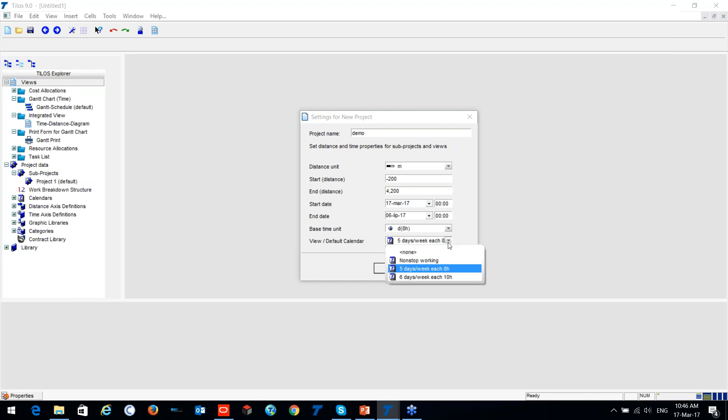So in my case, I'm just creating a new project, and I took the general template. In my general template, I already have my resources, some cost and time library information, and I will just set this as the demo. Project name is demo. I can choose a different unit type. Later on, all this information can be changed, so it's up to you. For now, you can just create. I'll just give the start and end distance, the start date and end date. It can use calendars; multiple calendar support is provided.

I'll just create a simple view, and what we can see here. So you see, this is the paper. Just think about Tilos as paper based: you can just take a pen and draw your activity or your project right on the paper. For instance, we have our start, let's say from 0, and at the end 4 kilometers. All right. So now I'm planning by just inserting one task.

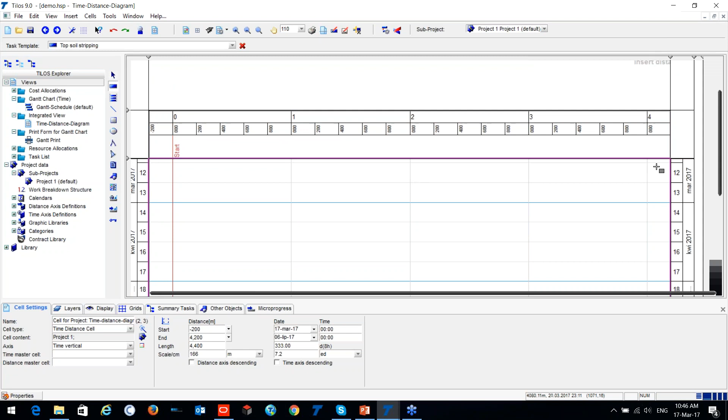I have here my template called topsoil stripping, and I'm planning my task. Okay, so I just draw my task. My task already has predefined information, such as this display and information about the quantity. Right now I don't have a quantity, but later on I will input it very easily.

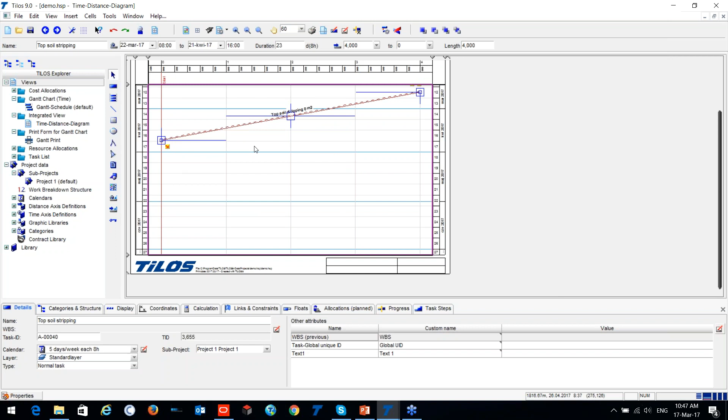Now, before this, what I would like to explain is this is our main area where our project will take place, but where is all the data stored? Tilos is a file-based system, and all the information you have is in one file. So this is, for instance, demo.hsp. This is the file, and all information is stored right there. You don't need any other files. And everything is in the Tilos Explorer.

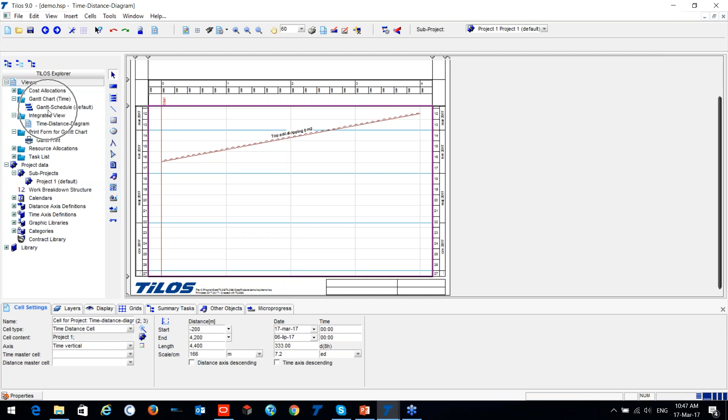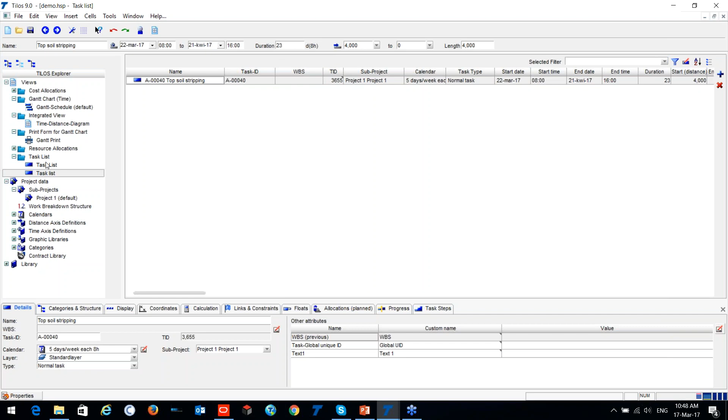So for instance, I have my different views: the traditional Gantt chart, or a time distance diagram. I can have my task list. You can see this is the same as Excel. You can have the ID, the work breakdown structure, the calendar information, start, and so on. Everything is there, and it's also possible to edit it. Moreover, if you have resources, you can have the resource list, all the lists over here, and they can be copy pasted, or it's up to you how you would like to see it.

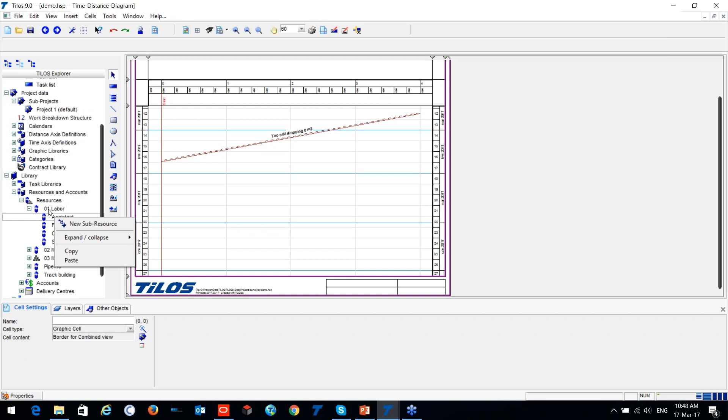Moreover, on the library part, please pay attention. This is our library part. In the library part, we have the information about my tasks and resources. If I open the resources, I have my predefined resources which come from the template. You can easily create a new resource or sub-resource. You can edit it, change the account, change the unit cost. So this is very easy and manageable to do.

Assigning a resource is also possible, just by selecting the task and adding the resource. For instance, I can have here one specialist and one Caterpillar, and you can see my resource has been assigned to the task. Moreover, graphical information is possible to see. We have here different symbols which we use for the graphical representation of the project, and other information: currency, units, categories, sector types, and so on.

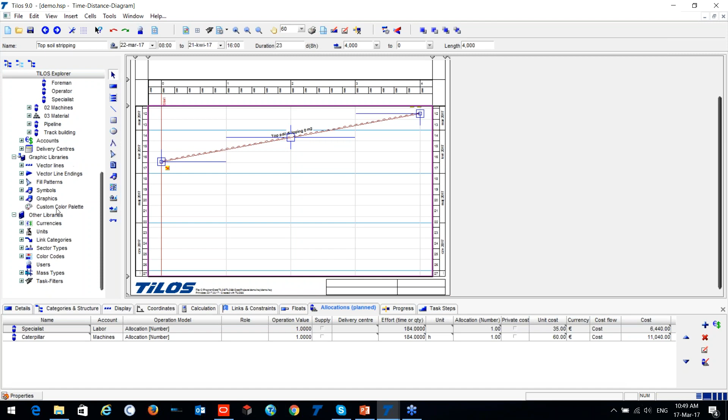So, what more can we do? I'll just show you an example of what we can do. In this case, let me remove my resource, and I will set the quantity. As I was mentioning before, Tilos has different types of calculation models. We can calculate according to the quantity, the work rate, or the duration. Let me show you how I can calculate according to the duration.

I'll give the quantity in cubic meters, and let's see what kind of information it gives me. Now, we have 20,000 cubic meters total to be stripped, but my planned work rate is only 120 cubic meters per hour. So Tilos automatically calculates my duration.

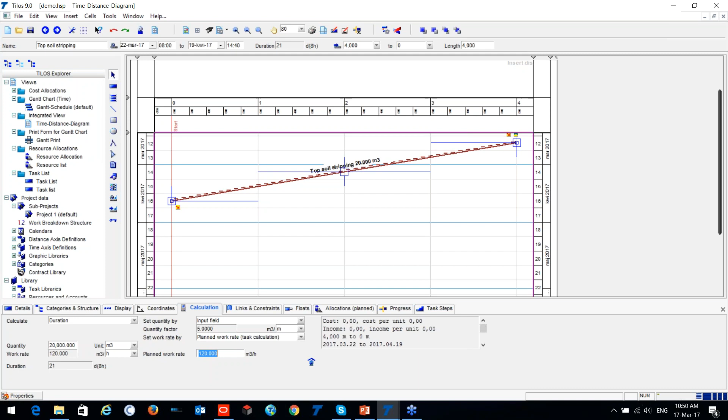Okay, so what if I increase my work rate, and I'd like to know what my duration will be then. I will change my work rate, for instance, to 240 cubic meters per hour, and please pay attention, my duration has been changed. This is on the properties bar. You can have detailed information. However, if you want quick access and a quick view, just look on the top.

We have the name of the activity, the start date, the start hour, the end date, and the duration, as well as the length information and the distance information too. So I'll just go back to my planned work rate. Okay, now another very good example I would like to show is the splitting.

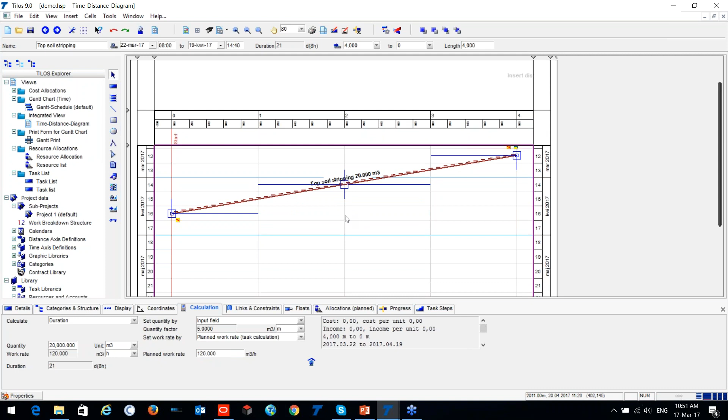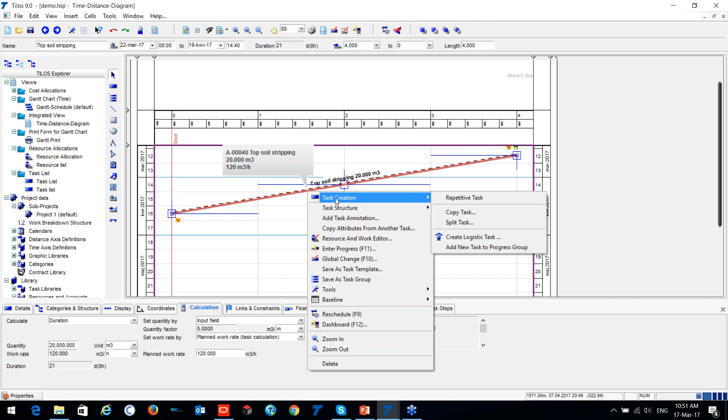Like when your activity is the quantity loaded, sometimes you have to stop your work or just split your activity. How can we do it in Tilos? In traditional CPM we are doing it all manually, like once we split our task, we have to calculate the duration of it, and then calculate the quantity of it. Here in Tilos we don't need to do this because it does it automatically. So we can split the task, different methods are available, but in my case, let me show you.

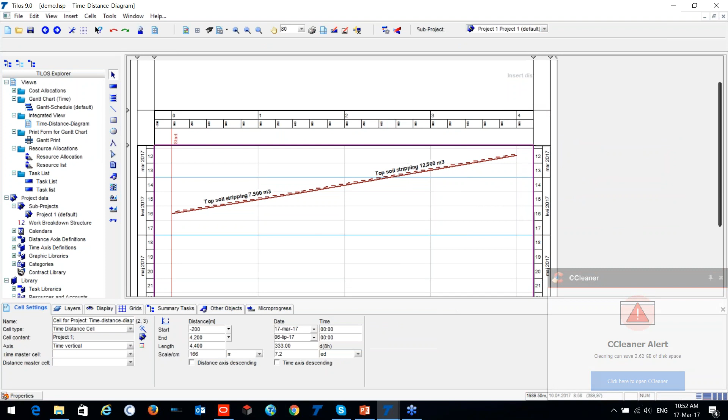I will split it on 1000 to 1500 meters. Okay, I'm splitting my task by the distance on 1500 meters. So please see, my task has been split, and the quantity automatically has been split as well. So from 1500 meters until 4000 meters, my amount is 12,500 cubic meters, but the rest part I have 7,500 cubic meters. All right, so this is how you can understand Tilos.

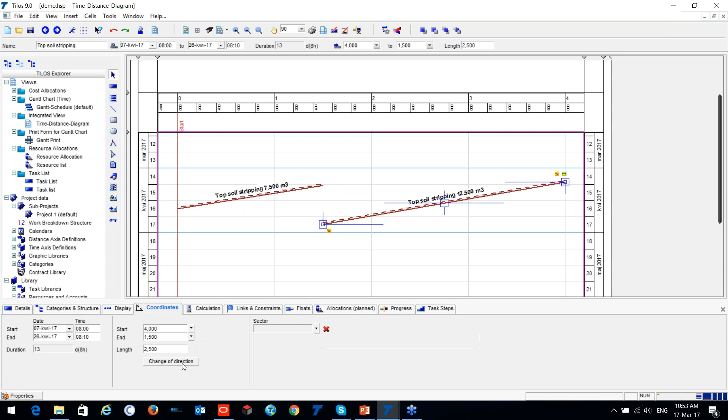Once again, I'm repeating, you are able to manage your crew movement. For instance, from 1,500 meters you are starting the work, and you can see that your crew will be working on this side, and it will take them 8 days, for instance. But if you would like to finish all the total works in a shorter period, you can, for instance, change the direction of it, manage according to this, or link it automatically and then reschedule it, and you will have everything right here. The linking options I would also like to mention, which are very powerful in Tilos.

Like we can have it by the calendar time, by the working time of the predecessor, the percentage of the duration of the predecessor. You know what the percentage is? If the predecessor has reached some percentage, then your successor can start. Equipment mobilization: you can give the mobilization of the equipment, you can give a fixed speed. Okay, so it will calculate your lag automatically.

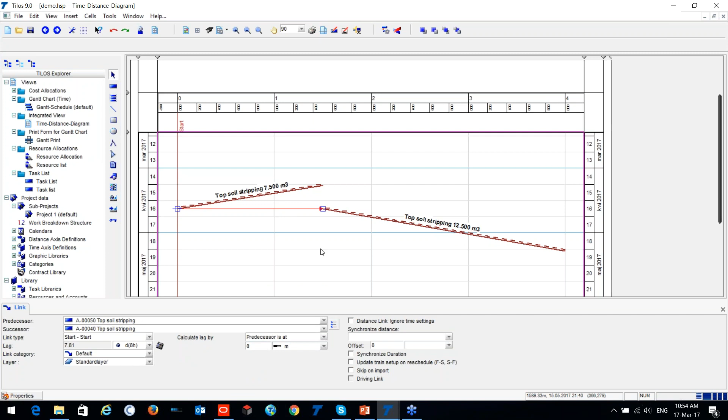Also distance to successors, which I was mentioning, that two activities, for instance, cannot work closer than, say, 100 meters or 200 meters, or also give additional time for that. Or for instance, when the predecessor is reaching some distance, then we can start our other activities. All right, so this is the example of how we can create the task. This is the linear task.

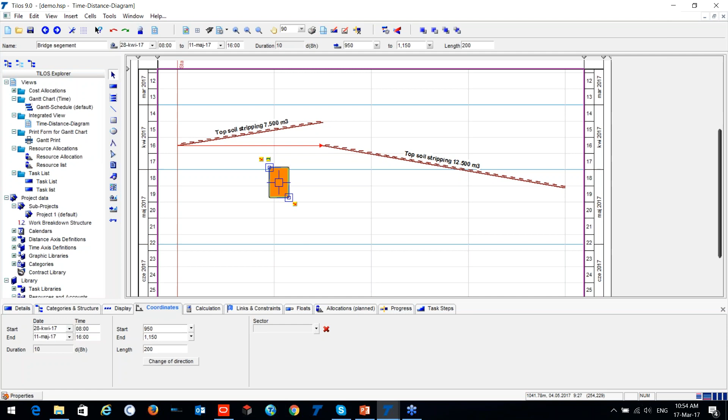I can easily create some structural task. Let's say, oops, not this one, I just misclicked. Let's say I have my bridge segment. So this is also the task. You can change the display of it. You can define any color if you want. It's up to you how you will have it. It can be, for instance, the rectangle, the parallelogram, the lines, and triangle. It's up to you how you would like to see it.

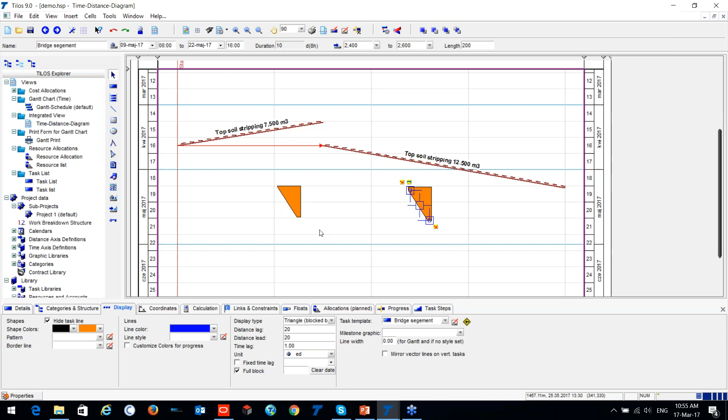Alright? The task can be moved very easily, and it can be copied and pasted with the Ctrl+C and Ctrl+V options. You can manipulate the task however you want. Alright? I will just delete them. And okay, this is about the basics that you have to know in order to read Tilos. Now, for another example, please see, I have my Tilos. This is a sample project.

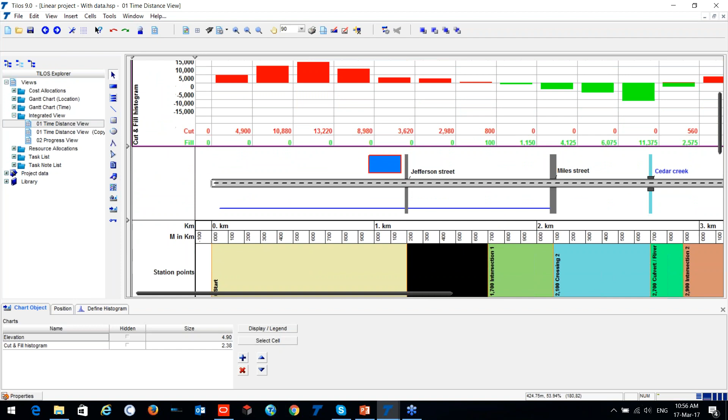This is, I think, each 500 meters. Yeah, this is the display of the information. Each 500 meters you can display information, each 100 or any other scale. Okay. Also the filling information, graphical representation, symbolic representation of our work, of our project. Sorry.

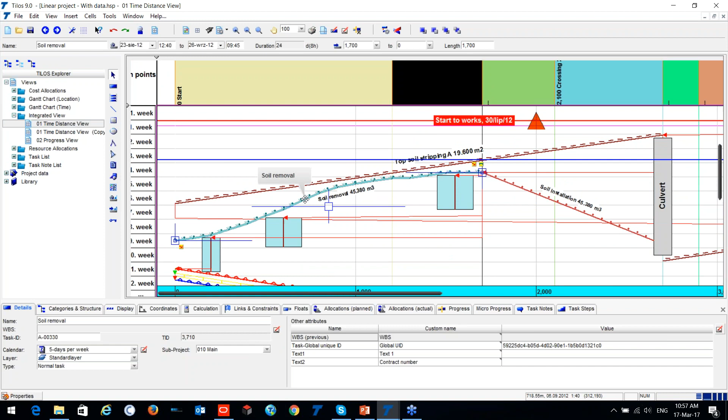Now, the information about my kilometer, the meters in kilometer, or my station point. So it can be the districts, for instance, or it can be the different sections as well. My milestone activities, and so on. So now, one thing that I would like to mention is, remember in the presentation part, we had the topic why we had the two breakdowns.

Now, this is the subject of it, that we have here my activity, which is soil removal, and the information, like, it's not just linear, it has some shape. So once I move my activity, it becomes a different shape. Why do I have it? Because it's getting the information from my profile data, which means right from above. Okay, so right from above.

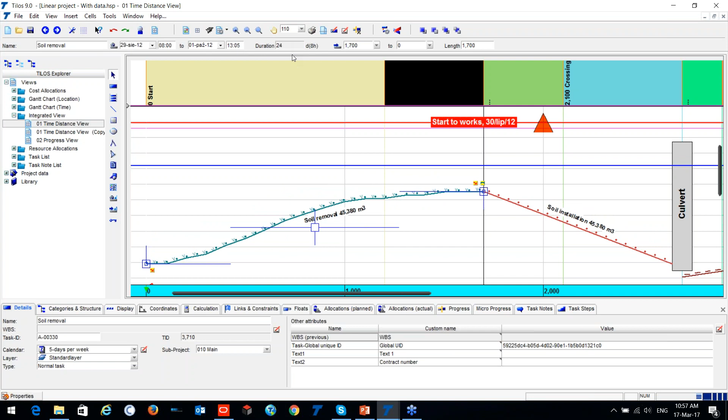I will shorten this task and you can see how it changes. Also, please pay attention to the quantity information. It changes on the quantity level as well. Alright, so this is a very powerful tool for us in order to calculate the real duration of our activity. Here we have that it will take us 24 days.

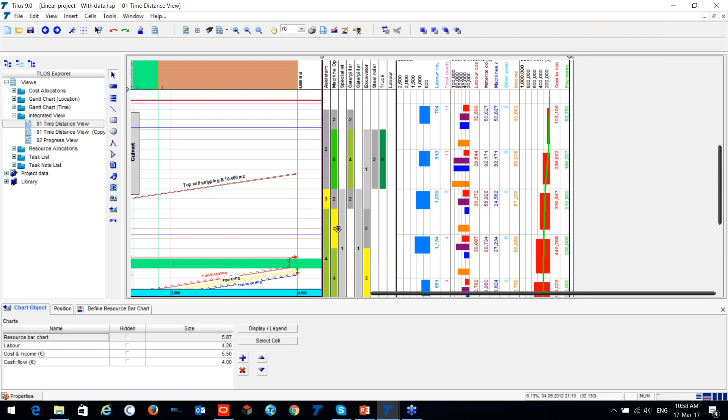Now, moreover, I would like to show you the information about the resources. These are the preloaded resources on activities, the labor information, the labor hours, total machine hours, cost and income, and the cash flow diagram as well. So that was on the time axis.

However, please see, I have the same information but according to my distance. Alright, so I have a machine operator, the specialist, and so on, the number of the resource over here. The histograms, such as on the distance, this is the 500 meters, and we have the total people working and total machine working numbers, and also the cost and income according to the distance.

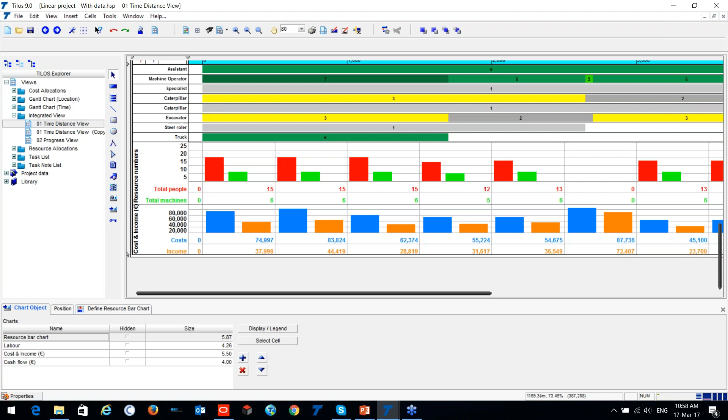Okay, so now the more, let's say, specific topic is tunnel building. This is just an example for you. We have 550 meters of the tunnel, which will be worked with a TBM. We have our planned soil classification, or for instance, let me just remove it for now.

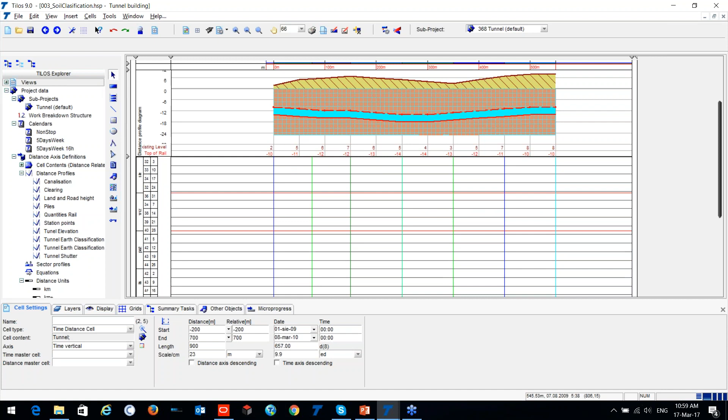What we can see here, we have a standard, traditional, not so standard time distance diagram. We have our profile, so this will be our tunnel. Okay, and now we would like to plan. So I would like to plan first my TBM. So I'm planning, I will start somewhere in August, and I have my plan. So now I planned my TBM work. This is my TBM, this is planned.

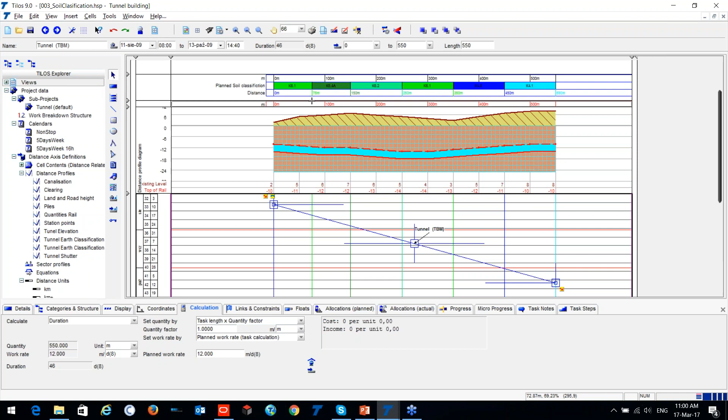This is usually when you are planning and submitting for the tenders. So you have a plan. Now, later on, you receive the information about the soil. So you have the planned soil classification. So what you can do is plan according to the given soil classification. From 0 meters until 75 meters, you have this K6.1, right? From 75 meters until 150 meters, you have K6.4A type.

Okay, let me just make it shorter. And now, once we have information from the planned soil classification, I can plan my works according to this data. All right. So I have my plan, and I'm starting at the same time. And now, please pay attention. Okay, I'll move it, I'll make it a bit visible. So please pay attention that the work rate has been changed according to the soil type. Once we reach the area where we have, for instance, 250 meters or 150 meters, it has a different work rate. Okay, so I'm going down, I'm moving.

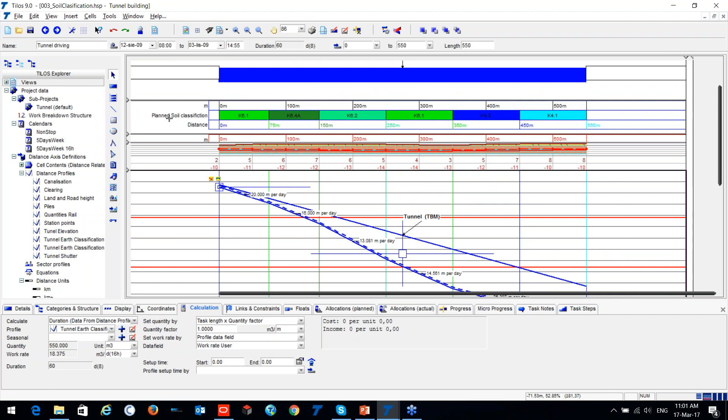And you can see that with the given planned soil classification, we can say that we'll be in delay for a few weeks. And you can see that the calculated finish date is this. This is based on the owner's soil classification.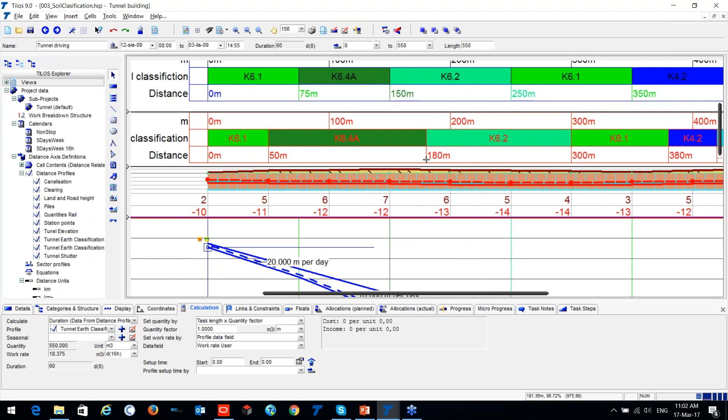Now, once you start the work, you did the geological test, and you have a bit different soil classification. So this is the panel where you have the actual soil classification. So you see, as I said, from 0 until 75 you have the K6.1 type of soil. However, in the actual, K6.1 was from 0 until 50 meters, and from 50 meters until 180 meters you have K6.4A.

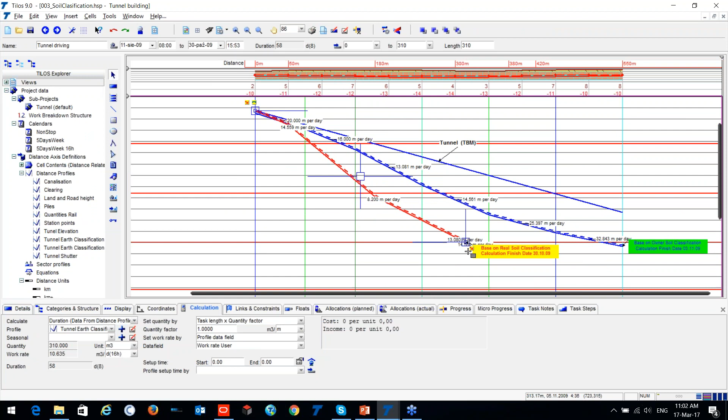All right, so this is different. So what you will do in this case, you will give the actual soil classification, and how it will look like, you see, you can say that according to your actual information, you will have a different work rate. So what it means is, if we plan, this is our initial plan, okay, we were about to finish this time. However, when we receive the information from the owner about the soil classification, we can have a plan according to their soil classification, okay?

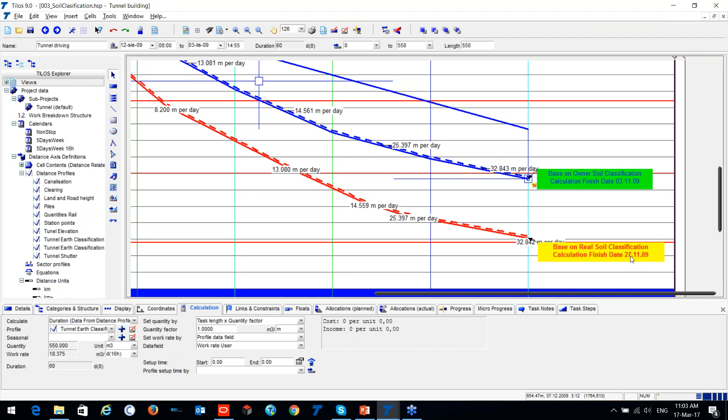But now when we actually do our work, we can see that, sorry guys, but your soil classification is actually a bit wrong. But here is our soil classification, and we can tell that we will finish on this date instead of this. So it's 1 month later. We'll finish it 1 month later. All right. So is it clear?

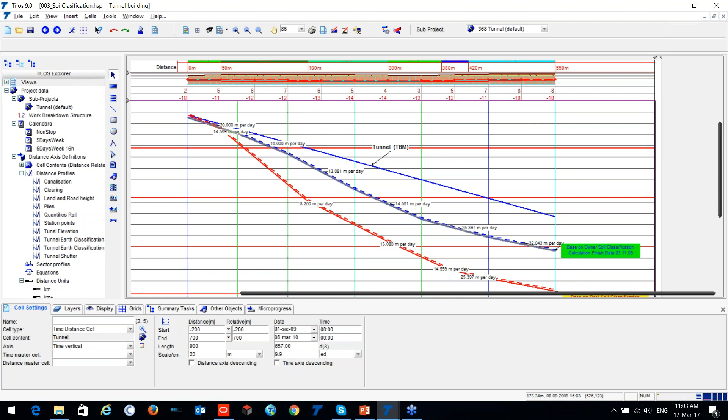Okay. So now another good feature that I would like to show is the actual export from Primavera. All right. Here I have my sample project. This is the metro. Okay, this is the metro project where I have the information about my tasks, and here I have the information, my distance and the start distance and the end distance. So this is my standard task and information I added about the distance.

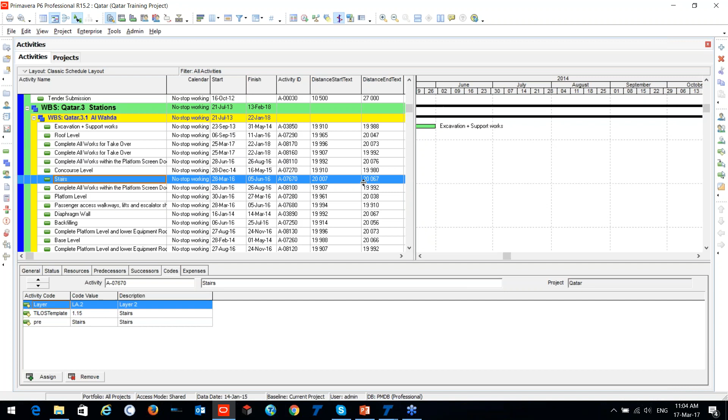So what I can do is I can just export it as a Primavera XML. Okay, I'm exporting this as a Primavera XML. I will not do this in order to save the time. I have already exported the XML file. So what I will do is I will just keep it over there, and right now let me explain to you my template.

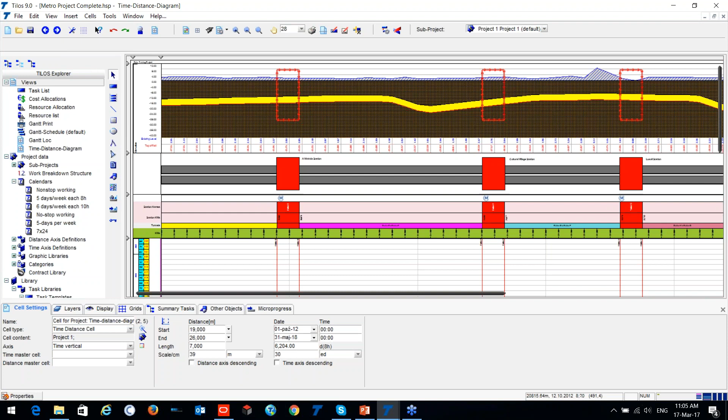Alright, this is a template where I have my tunnel information and I have my station. So this is the station name, different districts, the kilometer information, but without any activities. I have the empty time distance diagram. Alright, I have my empty time distance diagram. Nothing is there, but this is my template.

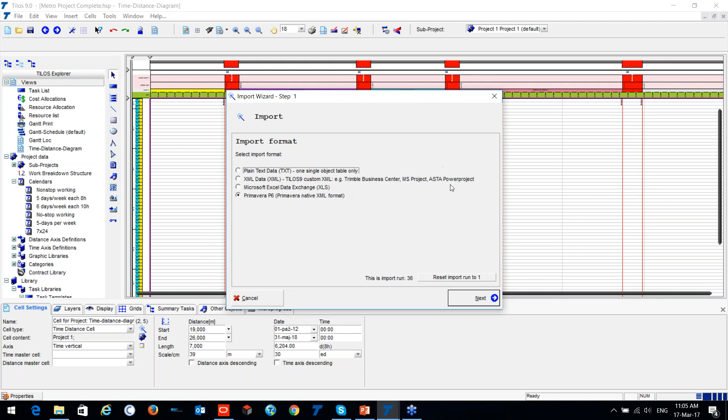So what I will do in this case is I will just import it. I will take the information from Primavera. It is, by the way, possible to import from MS Project and Asta Powerproject. Probably I was mentioning this. However, it's good to remind. I will take the next. I will select my XML. So this is my XML.

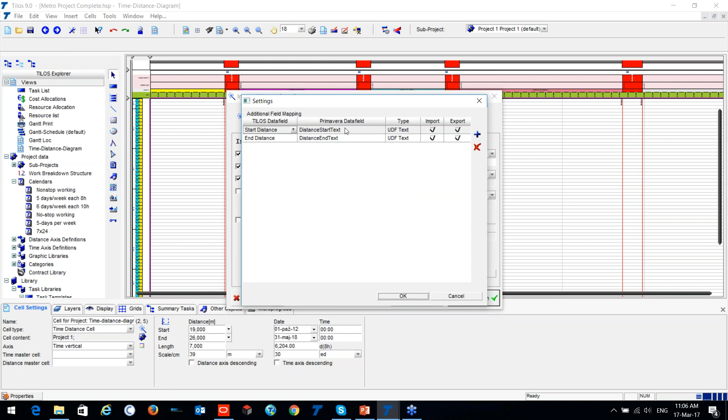Now, it gives us an opportunity to choose which data we would like to import, whether we would like to take the tasks, the categories, the links, the resources, the cost information, or some sector profiles. What I will do is I have here my additional field mapping. So I'm mapping my information from Tilos and information from Primavera. Okay, so once I click finish, you will see that all my activities just appeared over here. So these are all my activities, you can see.

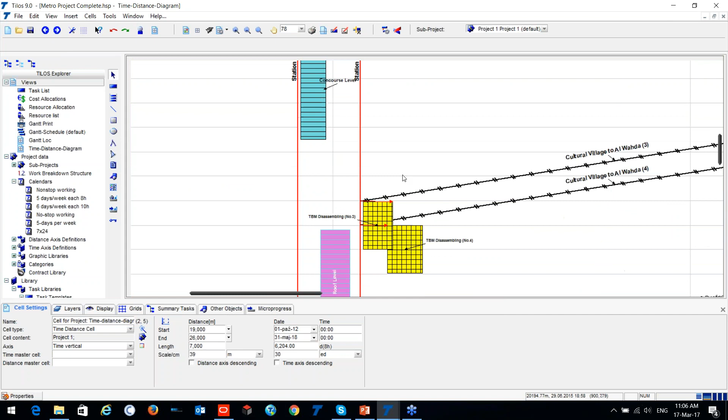So let's say this is a roof level, TBM disassembling number 3, TBM disassembling number 4. You have here the plant, the stairs, the backfilling activities, and so on. These are the station works, all right. However, if I move to my tasks, here are my linear tasks. Okay, so this is my linear task. So everything you can have in Primavera, it's possible to export to Tilos as well.

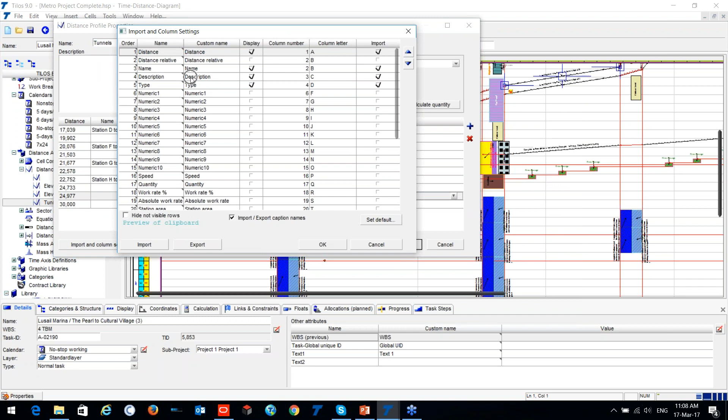It's up to you which information you would like to import, whether it's from Excel or from the clipboard. It's up to you how you would like and which information you would like to display on Tilos. Okay.

Mr. Kapila asked the question, being a junior engineer, how do I convince my boss or the site project director to use it? Well, ask them the simple question, do they have time distance scheduling, or are they using only the traditional CPM? If they do time distance scheduling, they can do it in Excel, but it will take them ages. So why do you have to spend that much time and do everything manually in Excel when you have Tilos?

Okay, moreover, let me see.

Mr. Jacob asked me whether an update file exists in Tilos, similar to the one in Primavera while importing, so that he doesn't have to change the graphical representation of the activities every time. Yes, you are updating the file. Once you, for instance, set your data date and enter the progress on the traditional CPM in Primavera, the same way you just export it and import it to Tilos. All right, so no problem with it. It has an update file, so you don't need to do everything new and lose any graphical representation of the activities.

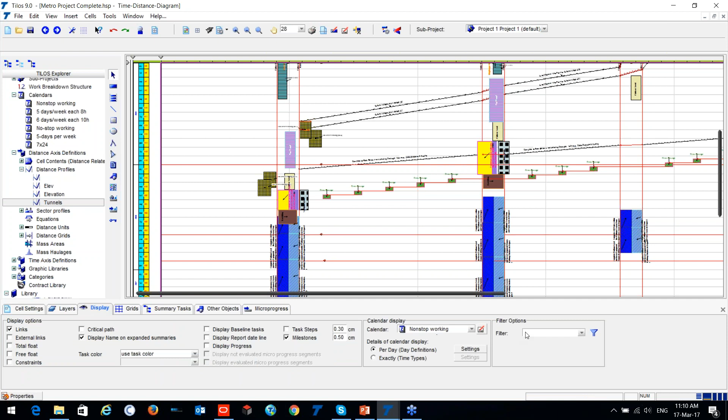Mr. Jacob asked whether the filters can be used. He would like to see if it's possible to display only one activity. Yes, it's possible to display only one activity. There are multiple filter options here. For instance, I can have the tasks. Here I have my filter options. It can be filtered according to different parameters: the calendar name, the category. For clashes, if you have tasks with a clash, you can just filter them in order to see them, no need to go through each activity. For constraints, or whether you have a critical path, you can filter by the critical path or by the task name.

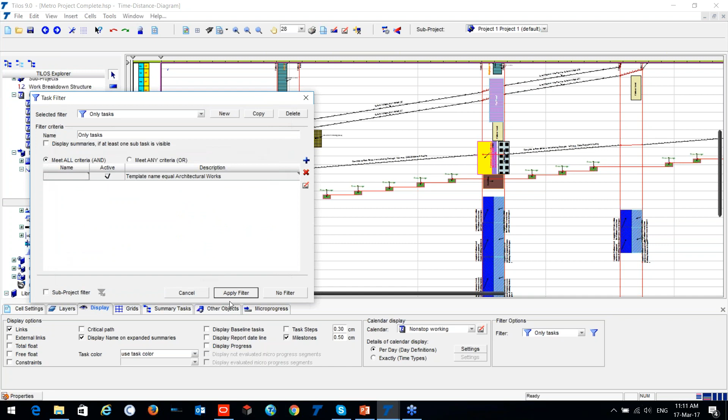For instance, I can have here the task template, and I will show some architectural works. So you can see I just used my filter for architectural works, and only the architectural works have been displayed. That's why I was telling you to understand Tilos as a paper view. So whatever you would like, for instance, if you would like to draw only one activity in order to see its progress or its information, it is possible to create a new view.

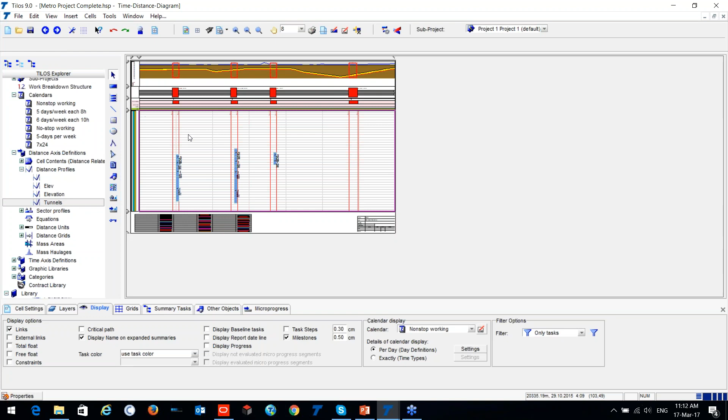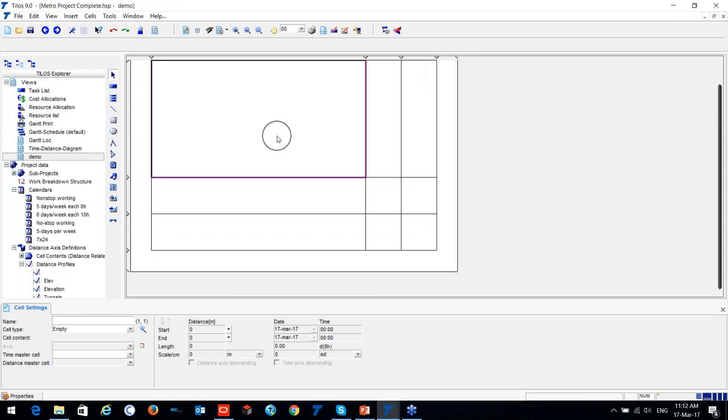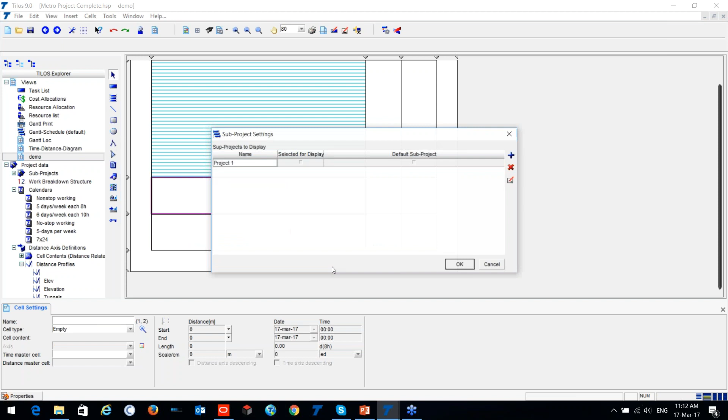So you can create a new view. I'll just do a demo. I can create a new view, add different rows, different columns. So this is up to you how you would like to display it. First might be the time distance diagram. For instance, I will make it a time distance diagram. Okay, so this is the time distance diagram. This is my traditional Gantt chart with time. This one will be my distance Gantt chart.

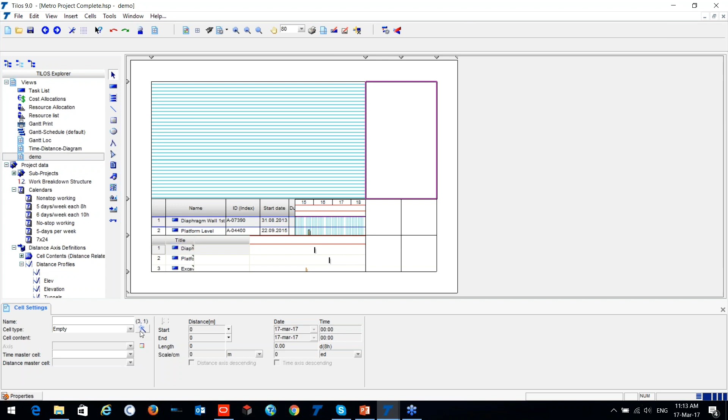On the left side, you can have dashboard reporting. For instance, I can even glue this cell. So this is the paper, this assumed paper. Whatever information you would like to see, you can have it, no problem. So I can have this one as my dashboard. So you see, this is my dashboard information. How you would like to see it is up to you. Now let me continue with the questions.

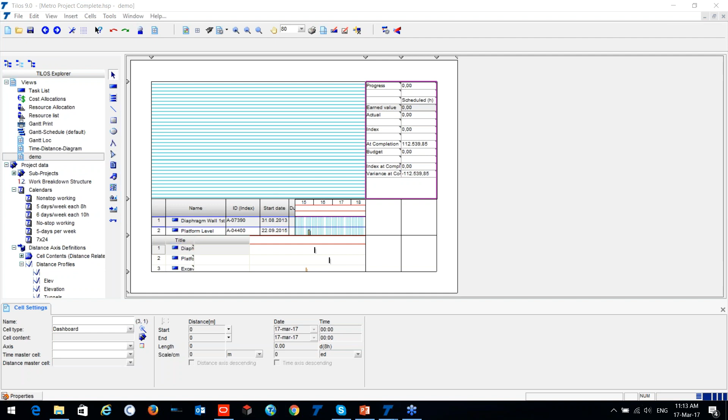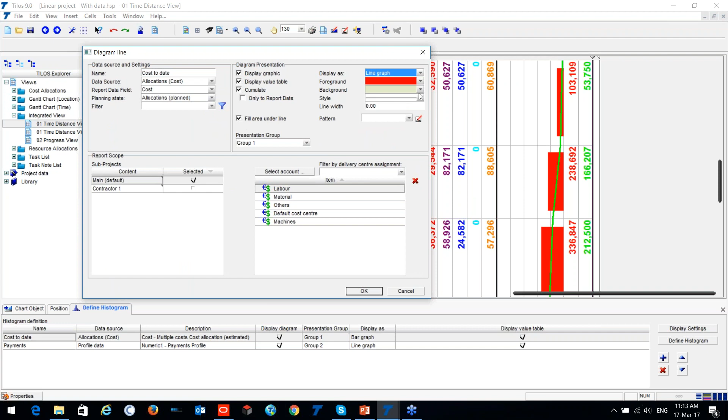Okay. Mr. Vatwa asked whether an S-curve is possible. Yes, the S-curve is possible. If I'm not mistaken, I have them already prepared. Yep, right here, for instance, this is my S-curve. I can display a different view on it. I can show the fill area under line. For instance, line, and I can change the line style. Okay, so here is the S-curve. It is possible to have the S-curve as well.

Okay, Mr. Verender said that he has around 3,000 activities in his Primavera schedule. No problem, you can have them as well, or you will have even fewer in Tilos.

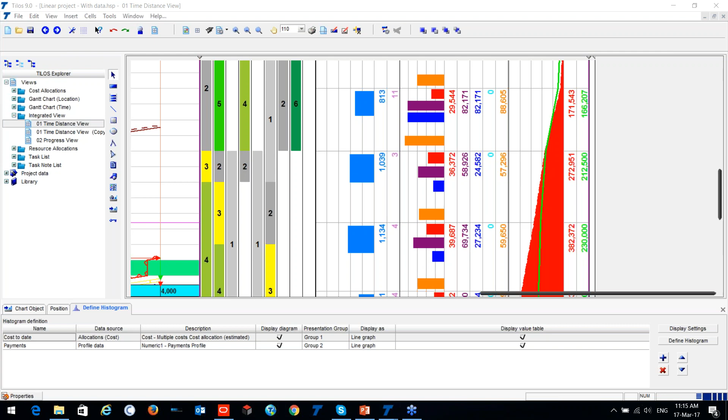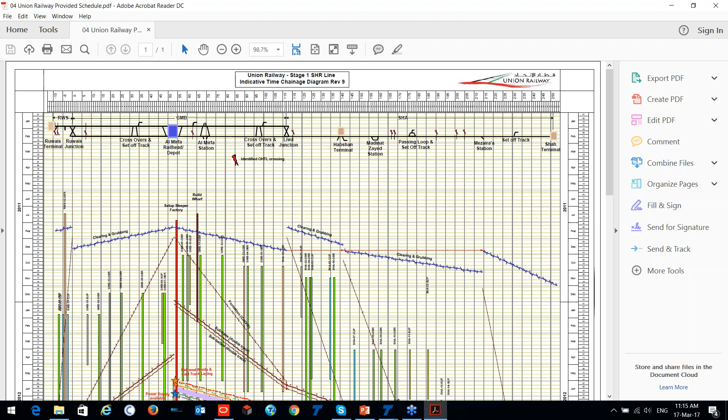Okay, another question we had: are all libraries shown today available as a standard? Yes, this is available in the standard. Moreover, I can show you another thing, another sample project from a real railway project. This is the Union Railway project. All these tasks we have here, you can see this. This is the real project.

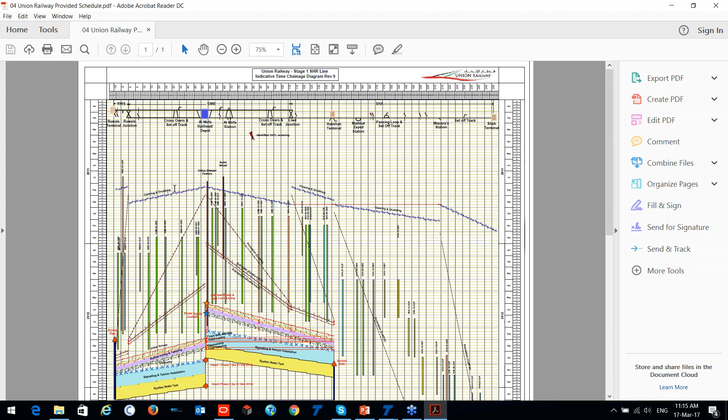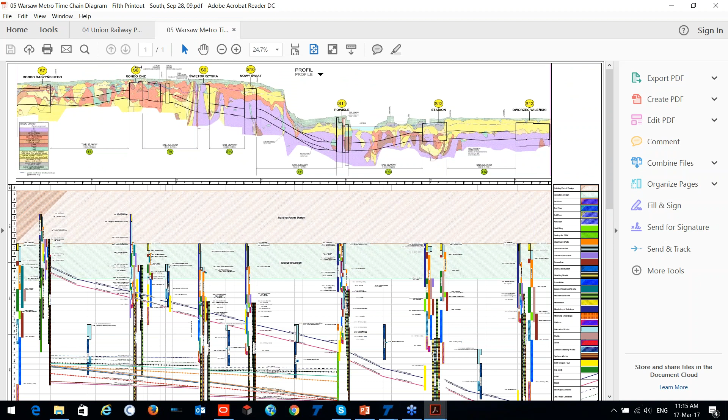Another option we have here. This is a Warsaw Metro. You can have here the graphical representation. We have here the metro stations. We have the station works, and we have the TBM works. All right, so all this we have.

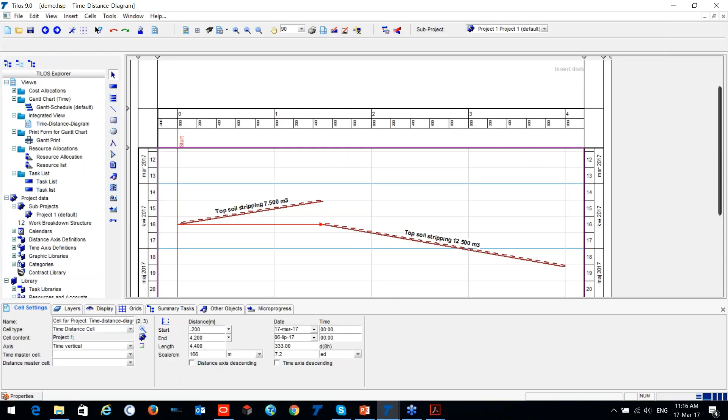Okay, another question we had is, can we have a special calendar with the holidays or special days off? Of course, you can have special calendars, and you can display them in Tilos, no problem with it. We have a number of calendars; you can use a different calendar for each activity. Here you can have a different calendar for each activity, or it is possible to have a layer.

Okay, I had a question from Mr. Render. He has around 3,000 activities in Primavera, and when he starts updating and comparing plan with actual it will be difficult. How to handle? Well, once you have your baseline, you export it to Tilos, and you save it here in Tilos as a baseline. You have here the baseline manager, and you can have multiple baseline information. Later on, once you enter the progress in your traditional CPM or whatever tool you are using, you just import to Tilos and compare it. Okay, so let me go on with the questions.

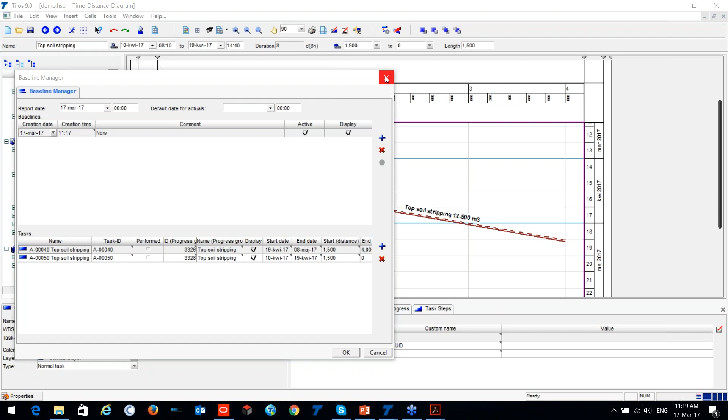Okay, we had already this question regarding filtering. Yes, we can filter the activities, no problem. Can we have a customized view as per responsibilities? Yes, you can have a customized view, no problem. I will even show you some examples. Here I have the sample project. So you can see I have here my view.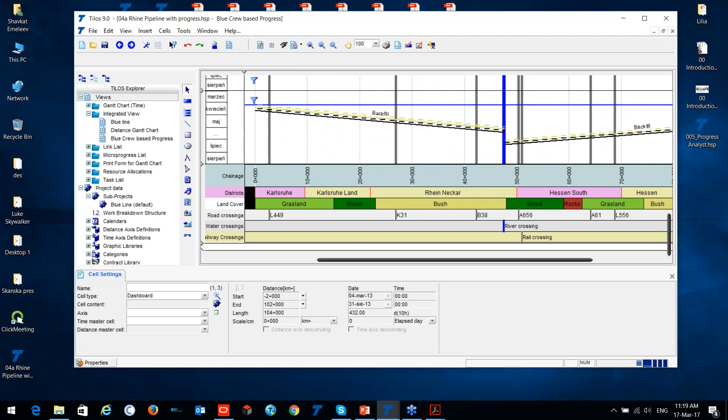This is my view. Below I have defined my districts, the land cover, whether I have road crossings, water crossings, railway crossings. Let me go above. Here we have the total information for all my works, the progress information. And below we have the activity.

So this is for only one activity. Let's say this activity is the clearing and grubbing activity. So this part is only for clearing and grubbing. You are just filtering and displaying only the information related to this activity. So you have the actual, the planned, the quantity, and so on.

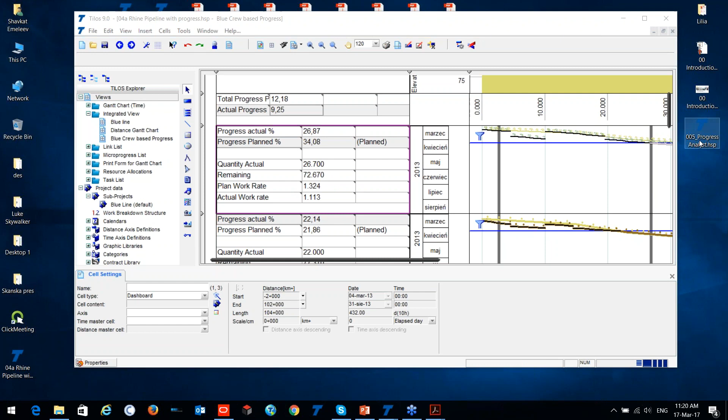Can we define different rates for different timelines for the resource? Yes, it is possible. You can give a different rate for a different timeline. For instance, let me show you another sample where you will understand what I mean. There is a possibility to plan according to different work rates.

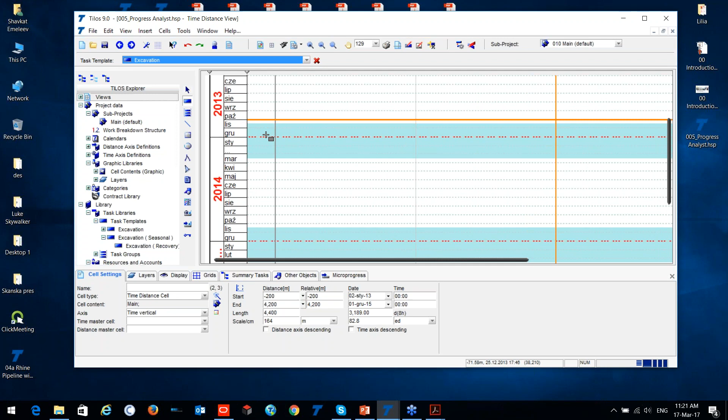Assuming that I have my excavation task, please note that between November and March, these are the Polish names of the months, so sorry for this, we have the winter period. And in our winter period we will, of course, have a different work rate.

However, initially we plan our task, and our task with the work rate is 500 cubic meters per day. But what we can do is we can plan according to our information that our work rate will drop down. For instance, if we were planning with 500 cubic meters, now my plan is 420. What we did not consider is our winter time period. In that case, what we can do is we can have the recovery.

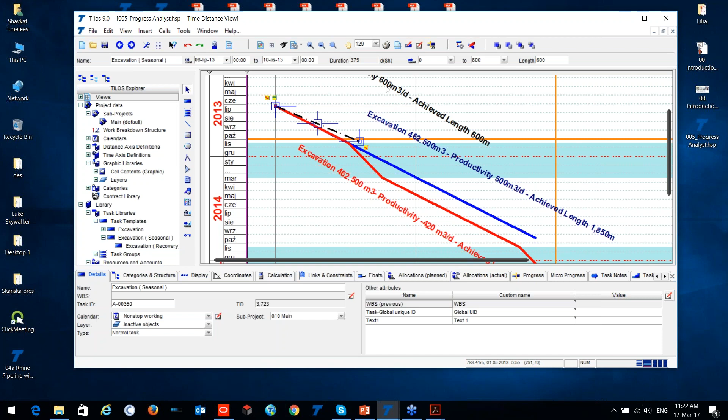What does it mean, recovery? It is when you know that during the winter time your productivity rate will drop down. First, you increase your work rate in the beginning. So now you can see instead of the 500, I have 600. So if I have it here, by this time I can catch up or even finish my activity much faster.

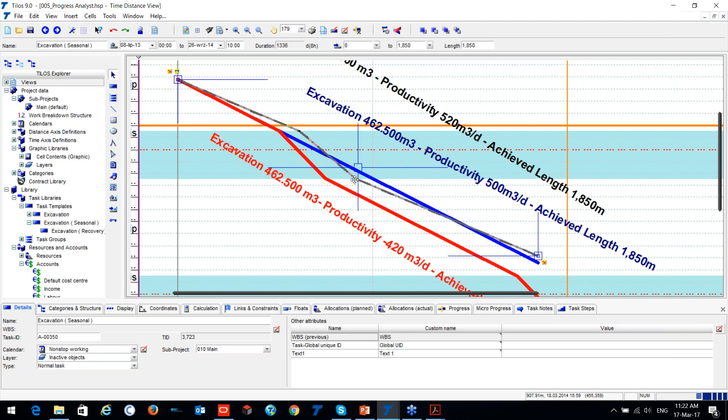So in this case, your recovery line reached a different distance because of the higher work rate, and during the winter time your work rate drops down, and then you are catching up or even finishing your baseline. All right, so let me continue with the questions.

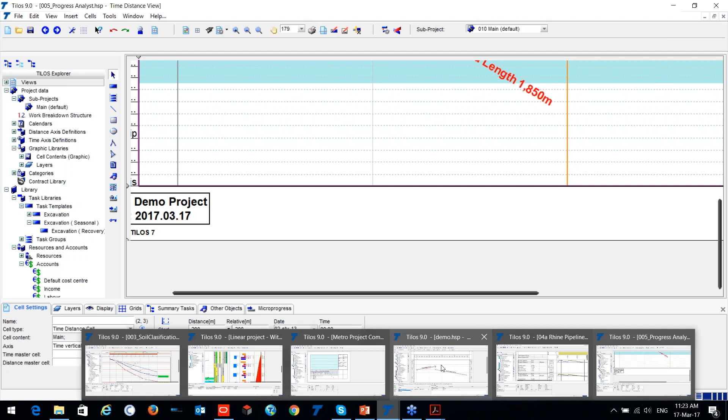We had a question whether we can show the activities that are not related with execution and cannot be shown in a specific project location, such as design, procurement, approval, etc. Of course, it is possible. For instance, you can have one task. Let me create one task here as a rectangle. I will hide the line, name it, and add some text on it, writing that this is design, or for instance procurement. So this is the procurement part.

It is also possible in this way to display the delays, so it can be the design delay or the procurement delay. And when you get the question why we have the delay on this specific area or task, why our activity has not started, you can easily print out this view and show them that this is the procurement delay or the design delay. It is possible to have it.

Another question we had: can multiple persons update their respective activities on the same project on different machines? Well, no. For now, the enterprise model is not active, however the developers are working on it. But what you can do is divide the project into two sub-projects; the first person updates activities on one, the second person on the other, and then you have one master plan and just combine them. Here we have sub-projects, so you can combine the two schedules to have it as one project. It is possible.

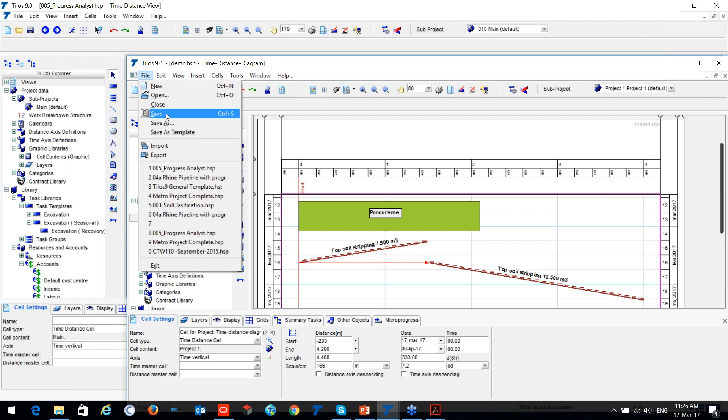I will save it to my desktop. I will show it over here, and here is my demo, so you can share it with anyone else. But of course, please put it in an archive, zip it and then send it. It will be much better.